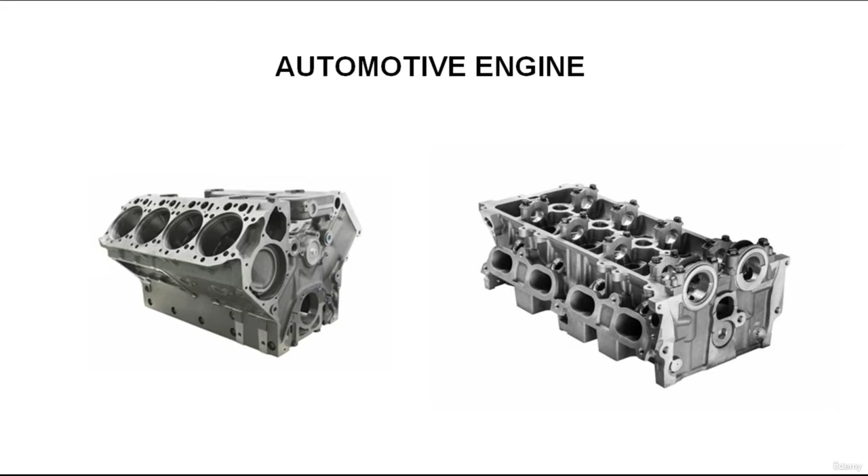Hello everyone. In this lecture we are going to study in depth the automotive engine. As we all know, the engine provides the power to drive the vehicle's wheels.

All automobile engines, both gasoline and diesel, are classified as internal combustion engines because the combustion or burning that creates energy takes place inside the engine.

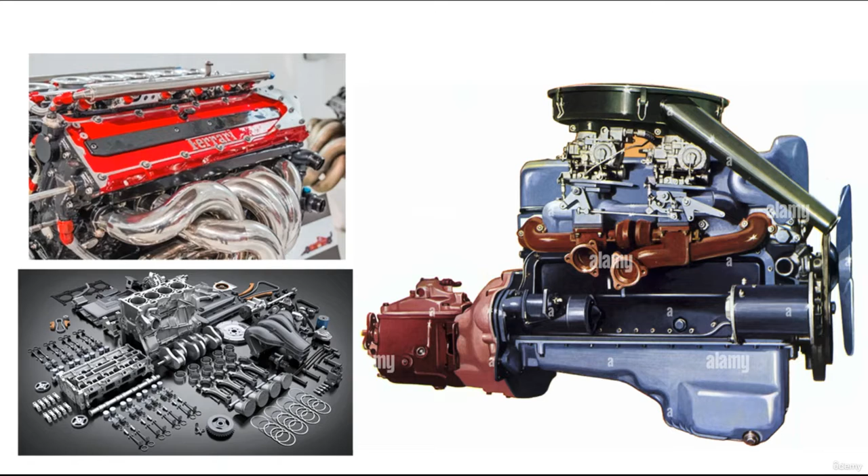The biggest part of the engine is the cylinder block. The cylinder block is a large casting of metal that is drilled with holes to allow for the passage of lubricants and coolant through the block and provide spaces for movement of mechanical parts. The block contains the cylinders, which are round passageways fitted with pistons, and houses the major mechanical parts of the engine.

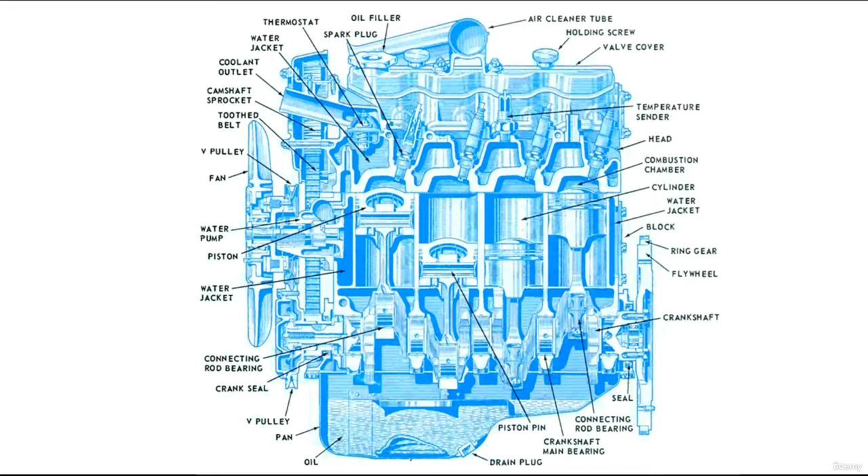The cylinder head fits on top of the cylinder block to close off and seal the top of the cylinder. The combustion chamber is an area into which the air-fuel mixture is compressed and burned. The cylinder head contains all or most of the combustion chamber, along with ports through which the air-fuel mixture enters and burned gases exit the cylinder, and the bore for the spark plug.

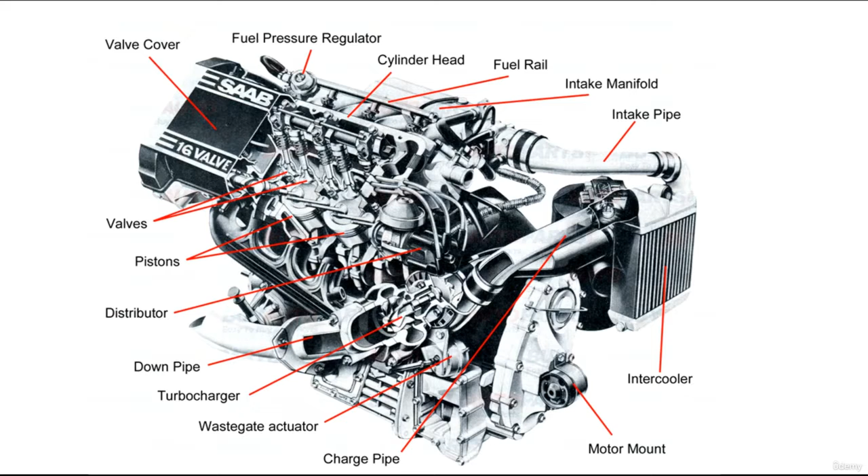The valve train is a series of parts used to open and close the intake and exhaust ports. A valve is a movable part that opens and closes the ports. A camshaft controls the movement of the valves, and springs are used to help close the valves.

The up and down motion of the pistons must be converted to rotary motion before it can drive the wheels of the vehicle. This conversion is achieved by linking the piston to the crankshaft with a connecting rod. The upper end of the connecting rod moves with the piston, while the lower end is attached to the crankshaft and moves in a circle. The end of the crankshaft connects to the flywheel or flex plate.

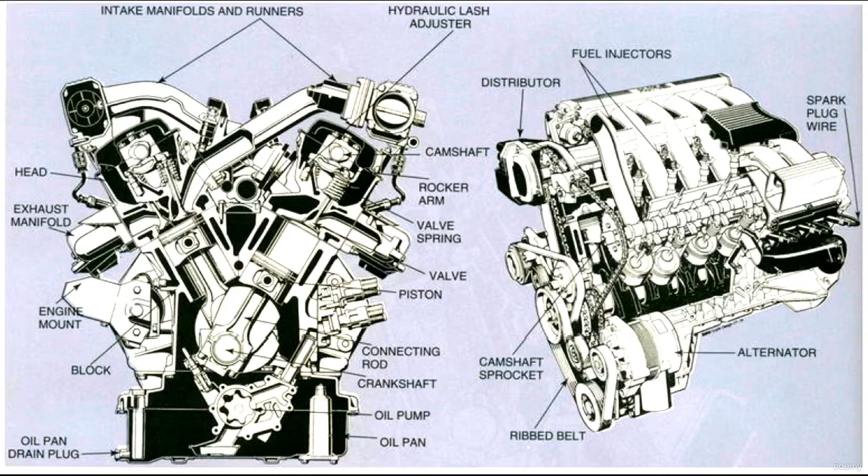So we'll talk right now about engine classifications. As we all know, today's automotive engines can be classified in several ways depending on the following design features.

Operational cycles: most technicians will generally come in contact with only 4-stroke engines. However, a few older cars have used, and some cars in the future will use, the 2-stroke engine.

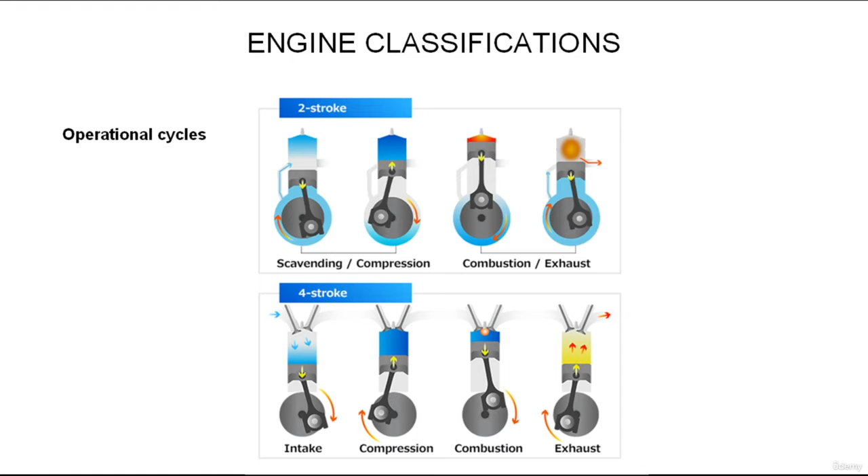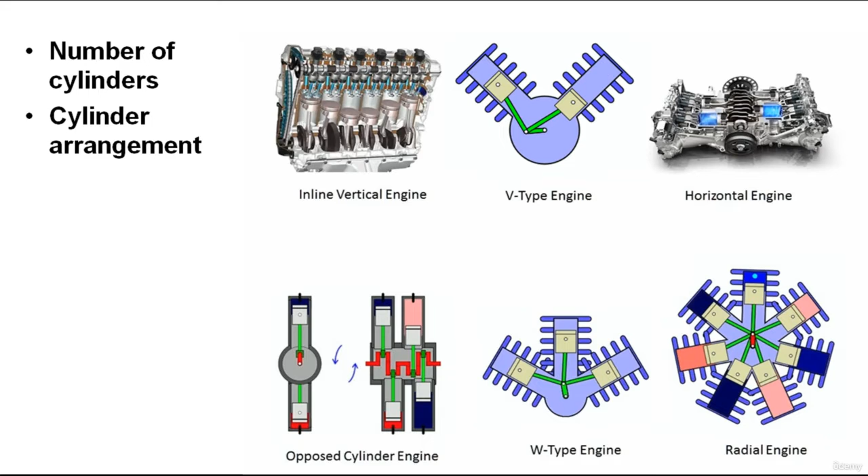Number of cylinders: current engine designs include 3, 4, 5, 6, 8, 10, and 12 cylinder engines. Cylinder arrangement: an engine can be flat, opposed, inline, or V-type. Other more complicated designs have also been used.

Also, we have the valve train type. Engine valve trains can be either the overhead camshaft (OHC) type, or the camshaft in the block, known as overhead valve (OHV) type. Some engines have separate camshafts for the intake and exhaust valves; based on the OHC design, these are called double overhead camshaft or DOHC engines. V-type DOHC engines have 4 camshafts, 2 on each side.

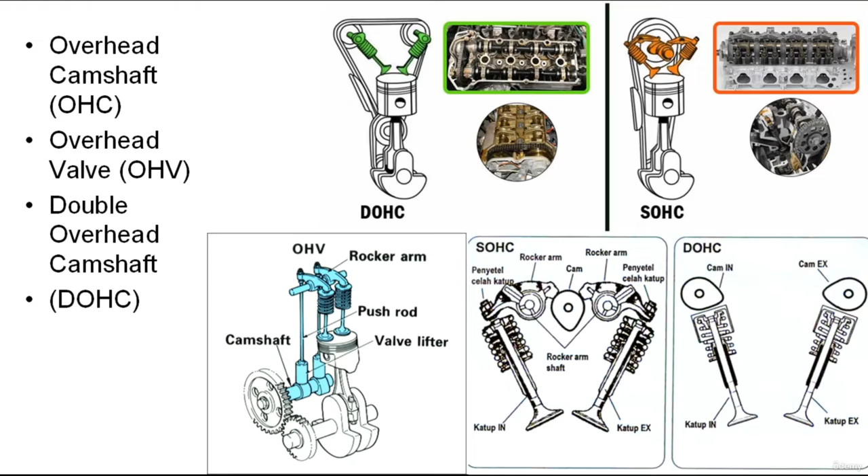Ignition type: there are 2 types of ignition systems, spark and compression. Gasoline engines use a spark ignition system, in which the air-fuel mixture is ignited by an electrical spark. Diesel engines, or compression ignition engines, have no spark plugs. A diesel engine relies on the heat generated as air is compressed to ignite the air-fuel mixture for the power stroke.

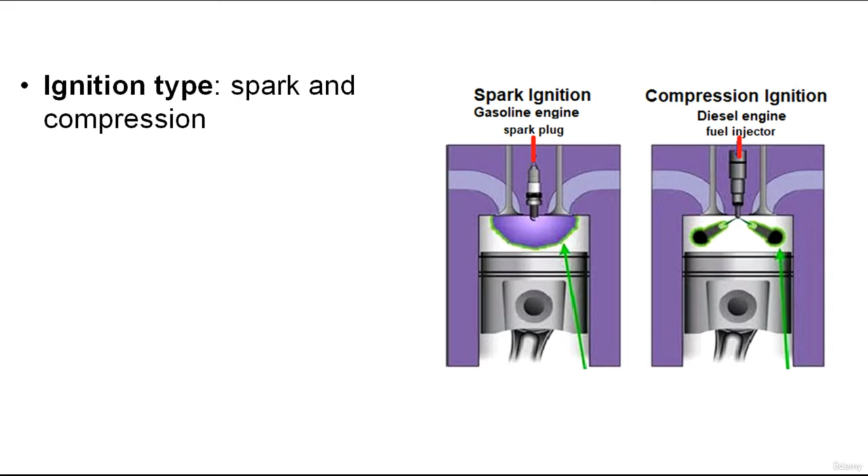Also, cooling system: there are both air-cooled and liquid-cooled engines in use. Nearly all of today's engines have a liquid cooling system.

Fuel type: several types of fuel currently used in automobile engines include gasoline, natural gas, methanol, diesel, and propane. The most commonly used is gasoline, although new fuels are being tested.

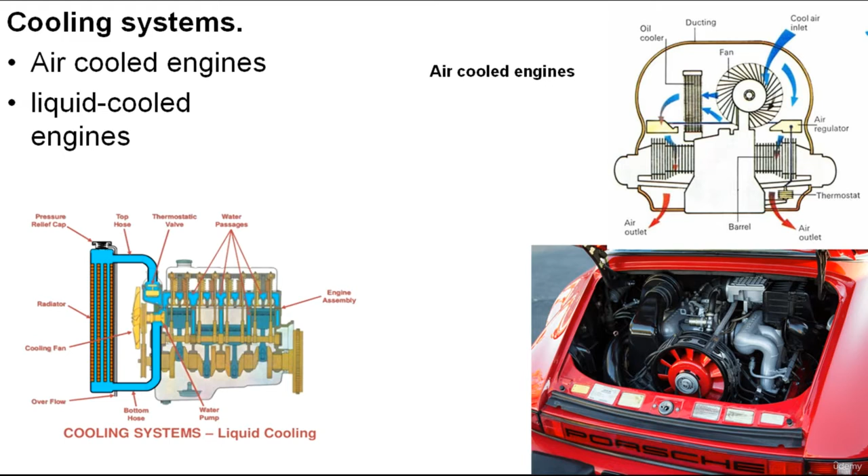So the four-stroke gasoline engine in a passenger car or truck provides the rotating power to drive the wheels through the transmission and driving axles.

All automotive engines, both gasoline and diesel, are classified as internal combustion because the combustion or burning takes place inside the engine. These systems require an air-fuel mixture that arrives in the combustion chamber at the correct time, and an engine constructed to withstand the temperatures and pressures created by the burning of thousands of fuel droplets.

So the combustion chamber is the space between the top of the piston and the cylinder head. It's an enclosed area in which the fuel and air mixture is burned. The piston fits into a hollow metal tube called a cylinder, and the piston moves up and down in the cylinder.

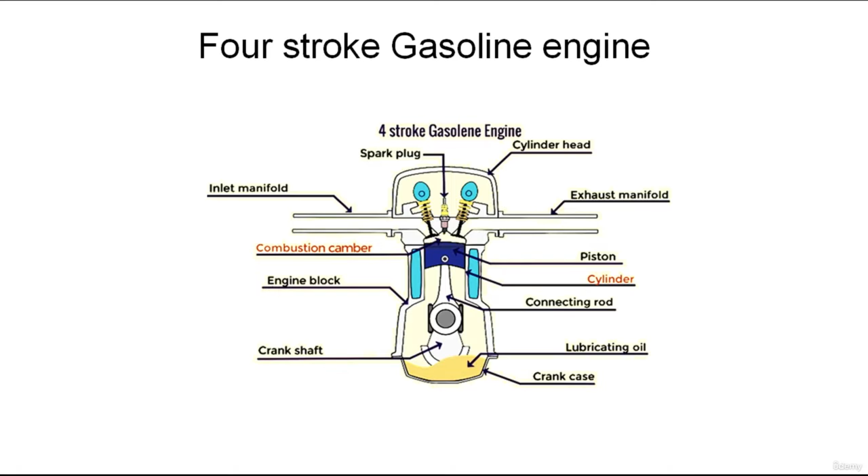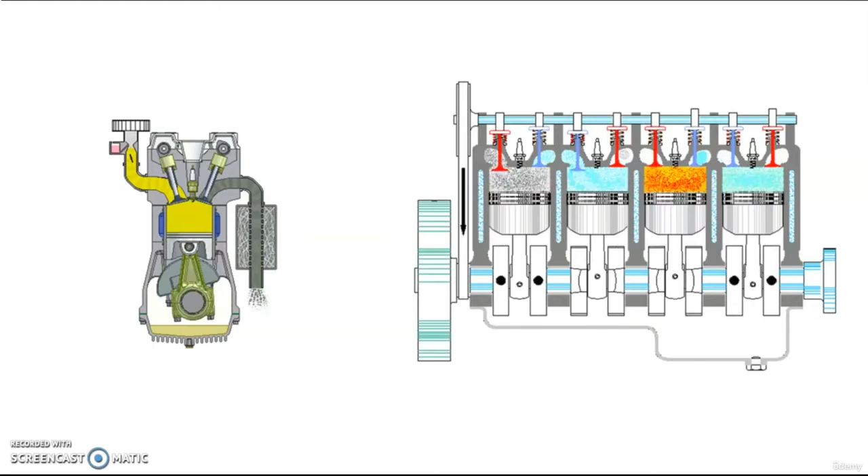This reciprocating motion must be converted to a rotary motion before it can drive the wheels of the vehicle. This change of motion is accomplished by connecting the piston to a crankshaft with a connecting rod. The upper end of the connecting rod moves with the piston as it moves up and down in the cylinder. The lower end of the connecting rod is attached to the crankshaft and moves in a circle, and the end of the crankshaft is connected to the flywheel, which transfers the engine's power through the drivetrain to the wheels.

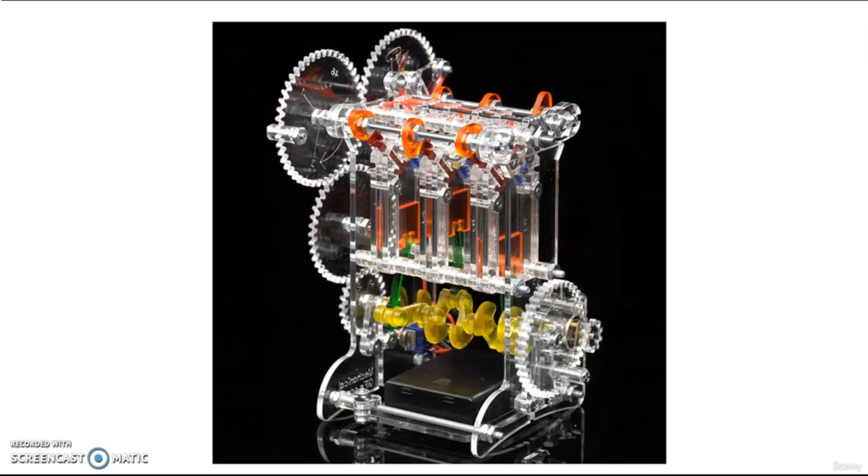In order to have complete combustion in an engine, the right amount of fuel must be mixed with the right amount of air. The mixture must be compressed in a sealed container, then ignited by the right amount of heat, which is the spark, at the right time. When these conditions exist, all the fuel that entered the cylinder is burned and converted to power, which is used to move the vehicle. Automotive engines have more than one cylinder.

Each cylinder should receive the same amount of air, fuel, and heat if the engine is to run efficiently. Although combustion must occur in a sealed cylinder, the cylinder must also have some means of allowing heat, fuel, and air into it. There must also be a means to allow the burned air-fuel mixture out, so the fresh mixture can enter and the engine can continue to run.

In order to accommodate these requirements, engines are fitted with valves. There are at least two valves at the top of each cylinder. The air-fuel mixture enters the combustion chamber through an intake valve and leaves after having been burned through an exhaust valve. The valves are accurately machined plugs that fit into machined openings. A valve is said to be seated or closed when it rests in its opening. When the valve is pushed off its seat, it opens.

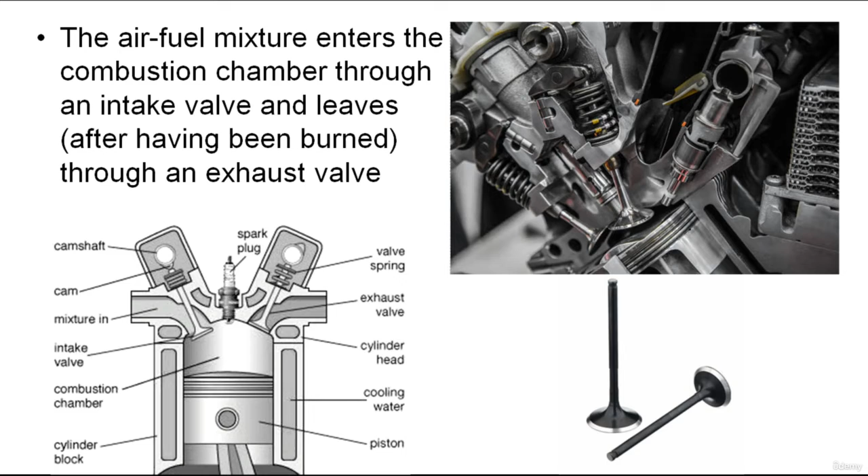A rotating camshaft, driven and timed to the crankshaft, opens and closes the intake and exhaust valves. Cams are raised sections of the shaft that have a high spot called a lobe. Cam lobes are oval shaped, and the placement of the lobe on the shaft determines when the valve will open. The height and shape of the lobe determines how far the valve will open and how long it will remain open in relation to piston movement.

As the camshaft rotates, the lobe rotates and pushes the valve open by pushing it away from its seat. Once the cam lobe rotates out of the way, the valve, forced by a spring, closes. The camshaft can be located either in the cylinder block or in the cylinder head.

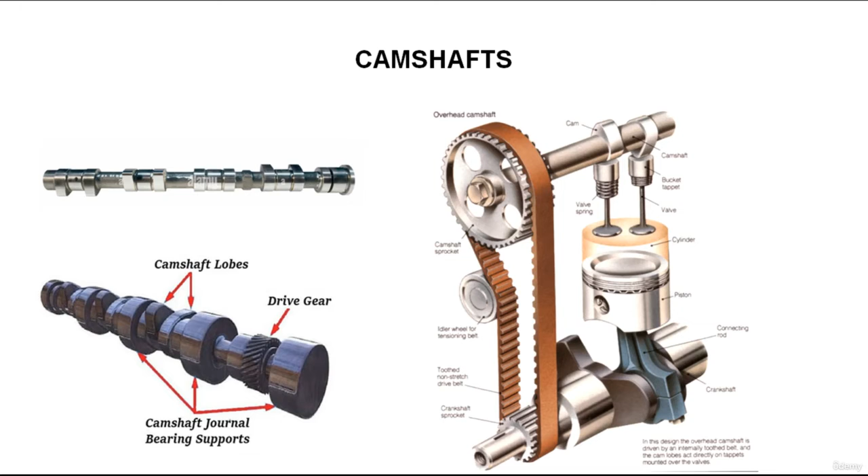When the action of the valves and the spark plug is properly timed to the movement of the piston, the combustion cycle takes place in four strokes of the piston: the intake stroke, the compression stroke, the power stroke, and the exhaust stroke. The camshaft is driven by the crankshaft through gears or sprockets and a cogged belt or timing chain. The camshaft turns at half of the crankshaft speed and rotates one complete turn during each complete four-stroke cycle.

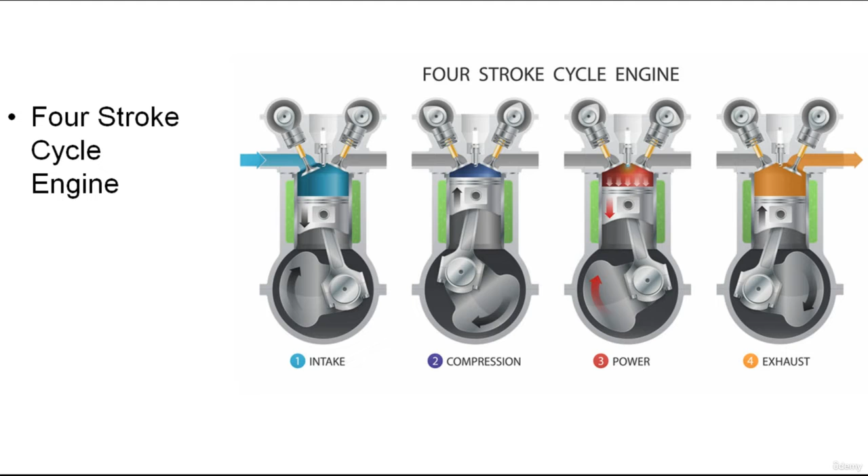So we have the four-stroke cycle. A stroke is the full travel of the piston either up or down in the cylinder's bore, and the reciprocal movement of the piston during the four strokes is converted to a rotary motion by the crankshaft. It takes two full revolutions of the crankshaft to complete the four-stroke cycle. One full revolution of the crankshaft is equal to 360 degrees of rotation, and therefore it takes 720 degrees to complete the four-stroke cycle. During one piston stroke, the crankshaft rotates 180 degrees.

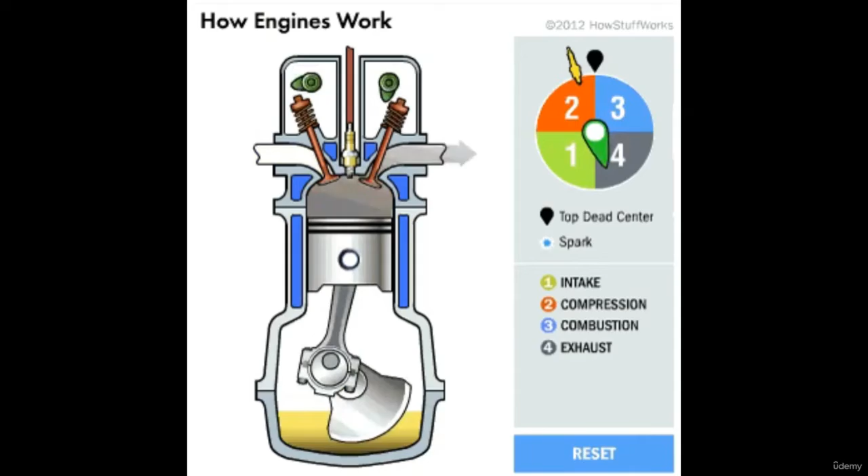Now, the flywheel. As we know, the piston moves by the pressure produced during combustion, but this moves the piston only about half a stroke, or a quarter of a revolution of the crankshaft. This explains why a flywheel is needed. The flywheel stores some of the power produced by the engine, and this power is used to keep the pistons in motion during the rest of the four-stroke cycle.

A heavy flywheel is only found on engines equipped with a manual transmission. Engines with automatic transmissions have a flex plate and a torque converter. The weight and motion of the fluid inside the torque converter serve as a flywheel.

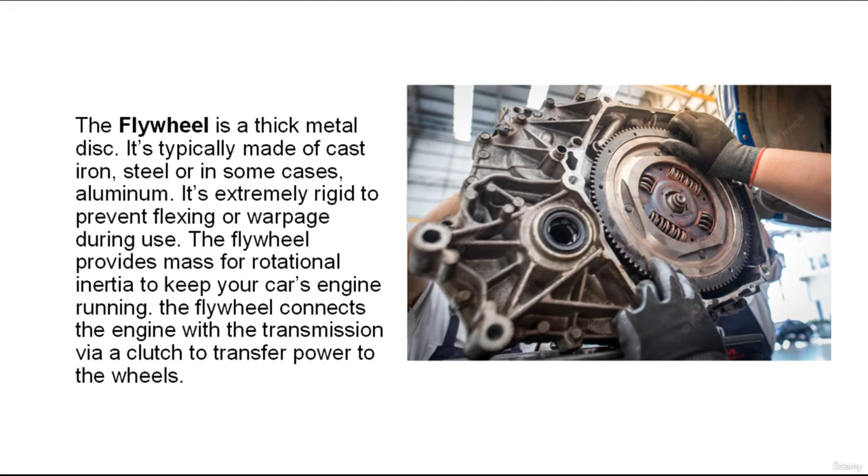The first stroke of the cycle is the intake stroke. As the piston moves away from top dead center, the intake valve opens. The downward movement of the piston increases the volume of the cylinder above it, reducing the pressure in the cylinder. This reduced pressure, commonly referred to as engine vacuum, causes atmospheric pressure to push a mixture of air and fuel through the open intake valve.

Some engines are equipped with a super or turbocharger that pushes more air past the valve. As the piston reaches the bottom of the stroke, the reduction in pressure slows the intake of air-fuel mixture, but it doesn't stop because of the weight and movement of the mixture. It continues to enter the cylinder until the intake valve closes, which happens after the piston has reached bottom dead center, or BDC.

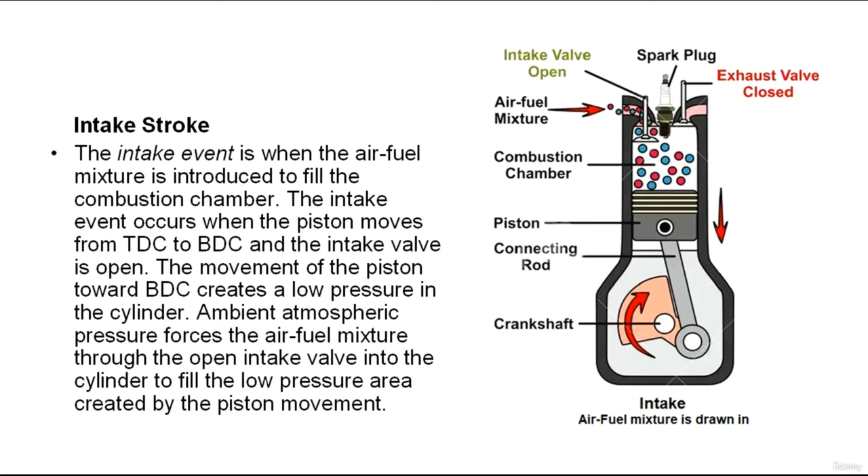This delayed closing of the valve increases the volumetric efficiency of the cylinder by packing as much air and fuel into it as possible. The compression stroke begins as the piston starts to move from BDC. The intake valve closes, trapping the air-fuel mixture in the cylinder, and the upward movement of the piston compresses the mixture, heating it up.

At TDC, the piston and cylinder walls form the combustion chamber in which the fuel will be burned. The volume of the cylinder with the piston at BDC compared to the volume with the piston at TDC determines the compression ratio of the engine.

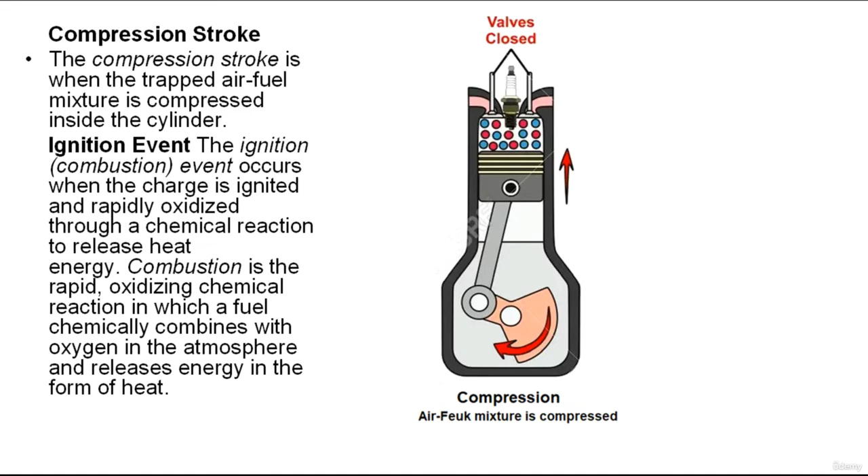Next is the power stroke. It begins as the compressed fuel mixture is ignited. With the valves still closed, an electrical spark across the electrodes of a spark plug ignites the air-fuel mixture, and the burning fuel rapidly expands, creating very high pressure against the top of the piston. This drives the piston down toward BDC, bottom dead center, and the downward movement of the piston is transmitted through the connecting rod to the crankshaft.

Next is the exhaust stroke. The exhaust valve opens just before the piston reaches BDC on the power stroke, so the pressure within the cylinder causes the exhaust gas to rush past the open valve and into the exhaust system. Movement of the piston from BDC pushes most of the remaining exhaust gas from the cylinder.

As the piston nears TDC, the exhaust valve begins to close as the intake valve starts to open. The exhaust stroke completes the 4-stroke cycle, and the opening of the intake valve begins the cycle again. This cycle occurs in each cylinder and is repeated over and over as long as the engine is running.

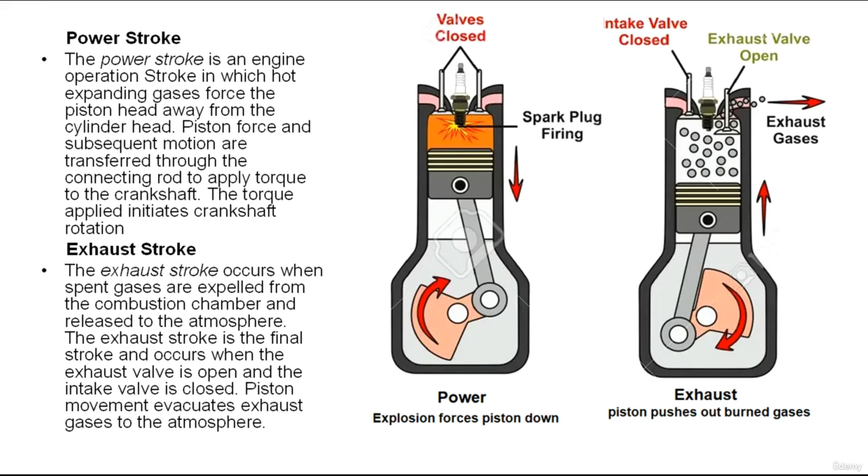The firing order: an engine's firing order states the sequence in which an engine's pistons are on their power stroke, and therefore the order in which the cylinders' spark plugs fire. The firing order also indicates the position of all the pistons in an engine when a cylinder is firing.

For example, consider a 4-cylinder engine with a firing order of 1, 3, 4, 2. The sequence begins with piston number 1 on the compression stroke. During that time, piston number 3 is moving down on its intake stroke, number 4 is moving up on its exhaust stroke, and number 2 is moving down on its power stroke.

These events are identified by where each piston needs to be in order for number 3 to be ready to fire next, and so on. The firing order of an engine is determined by its design and manufacturer's preferences. An engine's firing order can be found on the engine itself, on the engine's emissions label, or in the service manual.

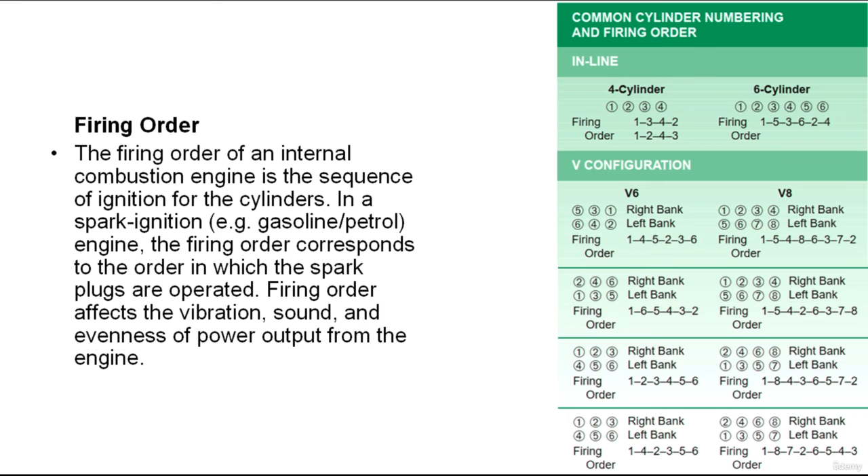We'll move now to study the 2-stroke gasoline engine. In the past, several imported vehicles have used 2-stroke engines. As the name implies, this engine requires only 2 strokes of the piston to complete all 4 operations: intake, compression, power, and exhaust. This is accomplished as follows.

First, movement of the piston from BDC, bottom dead center, to TDC, top dead center, completes both intake and compression. Second, when the piston nears TDC, the compressed air-fuel mixture is ignited, causing an expansion of the gases. During this time, the intake and exhaust ports are closed. Third, the expanding gases in the cylinder force the piston down, rotating the crankshaft.

Fourth, with the piston at BDC, the intake and exhaust ports are both open, allowing exhaust gases to leave the cylinder and air-fuel mixture to enter.

So although the 2-stroke cycle engine is simple in design and lightweight because it lacks a valve train, it has not been widely used in automobiles. It tends to be less fuel efficient and release more pollutants into the atmosphere than 4-stroke engines. Oil is often in the exhaust stream because these engines require constant oil delivery to the cylinders to keep the piston lubricated, and some of these engines require a certain amount of oil to be mixed with the fuel.